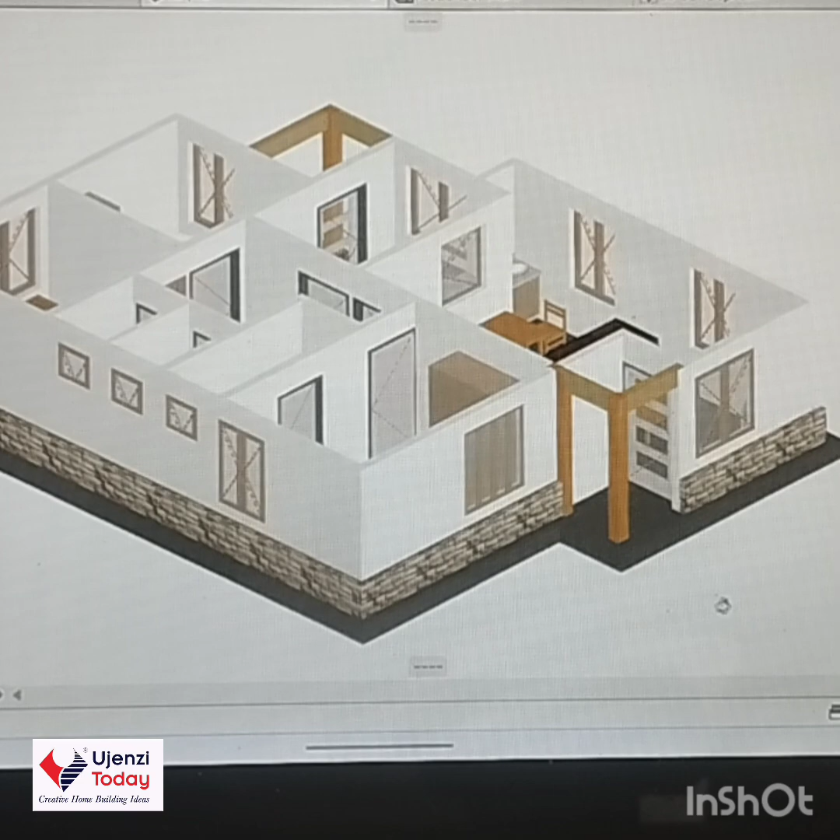Then when you come to this other side in the kitchen, you also notice we have the kitchen and the wash basin for the dining, and they are also just around the same space. That is also one reason why this house is cheap to construct.

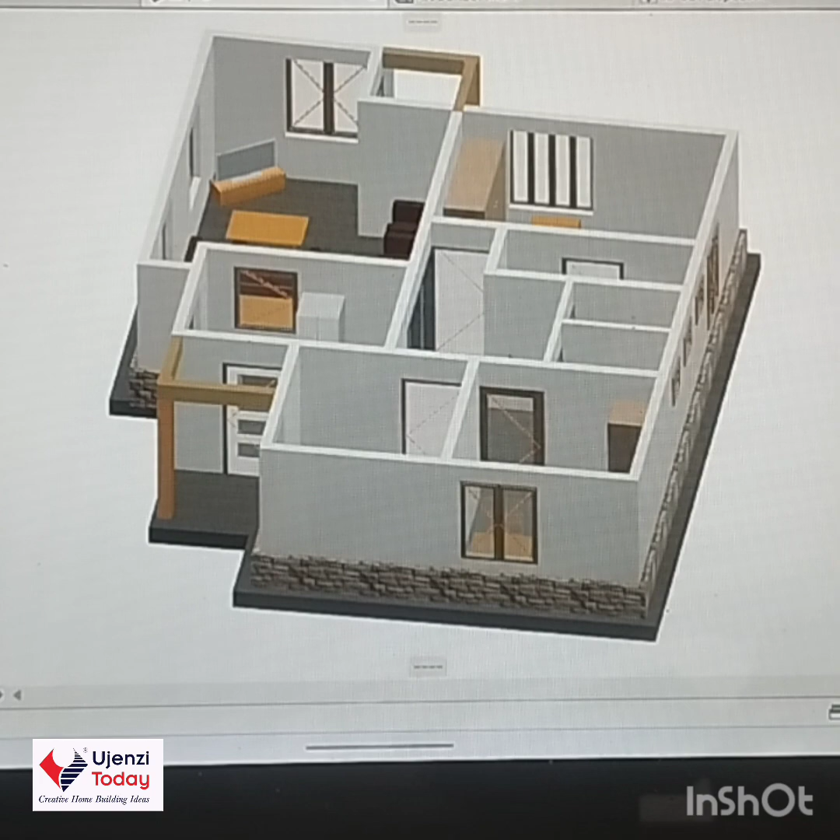Another reason is that we've also really worked on the space, so that you just have one passage around one common area where all the other rooms are accessed from. Another reason also why this house is cheap to build, or affordable. The right word is affordable. I look at the bedroom.

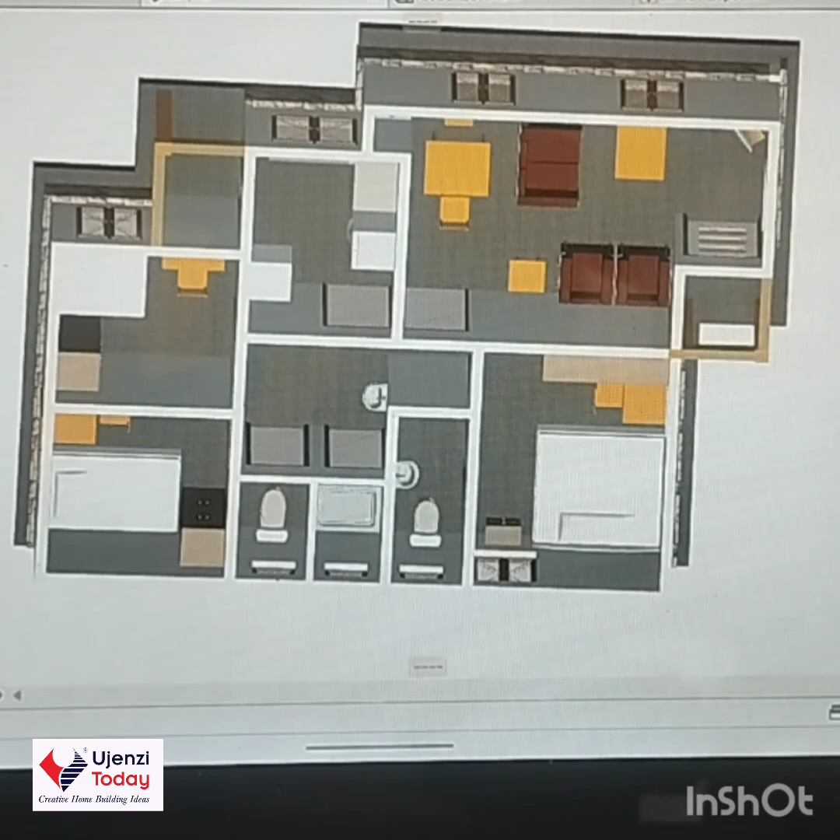The bedroom roughly is around 8 feet by 8 feet. It's enough for a 4 feet bed, a small table and a chair, and a small cabinet tucked in somewhere. The two rooms are equally of the same size.

Then when you look at the master bedroom also, you have enough space to put a 5 by 6 bed. You have even space to put a small table there, and you have your wardrobe also there to put your dresses. Then we've also tucked in a master bath for yourself.

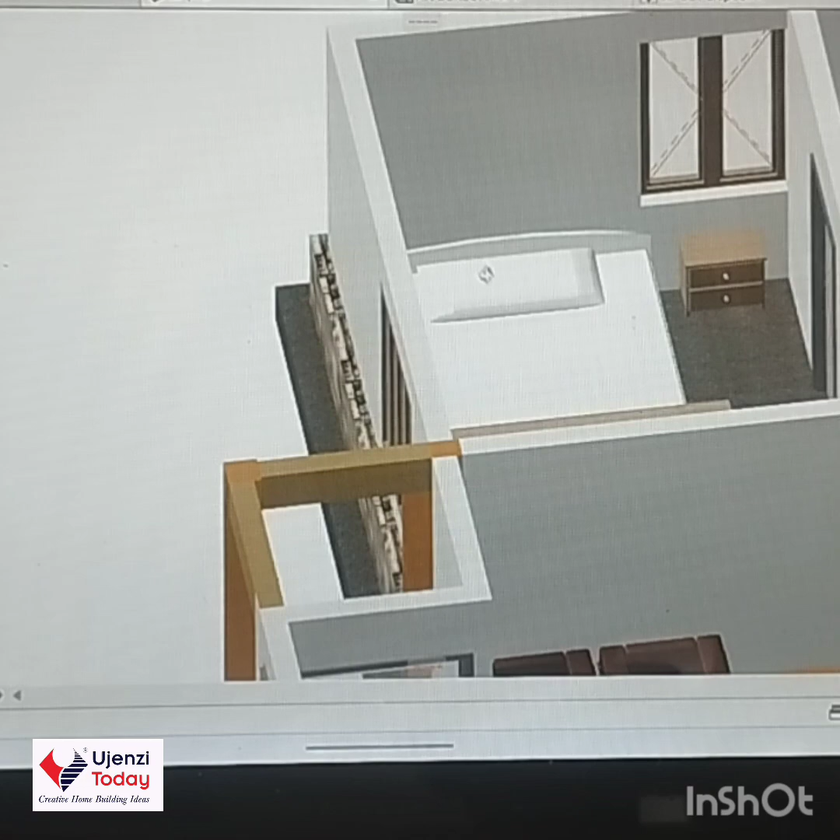And also the master bedroom is privately located. Between the master bedroom and those two bedrooms, we have a master bath, we have a common bath, and we have a common toilet.

So that increases a lot of privacy, even at night, when you're sleeping, or even when you have small kids and they're playing in the corridor, playing in the other rooms. It creates a lot of privacy for you.

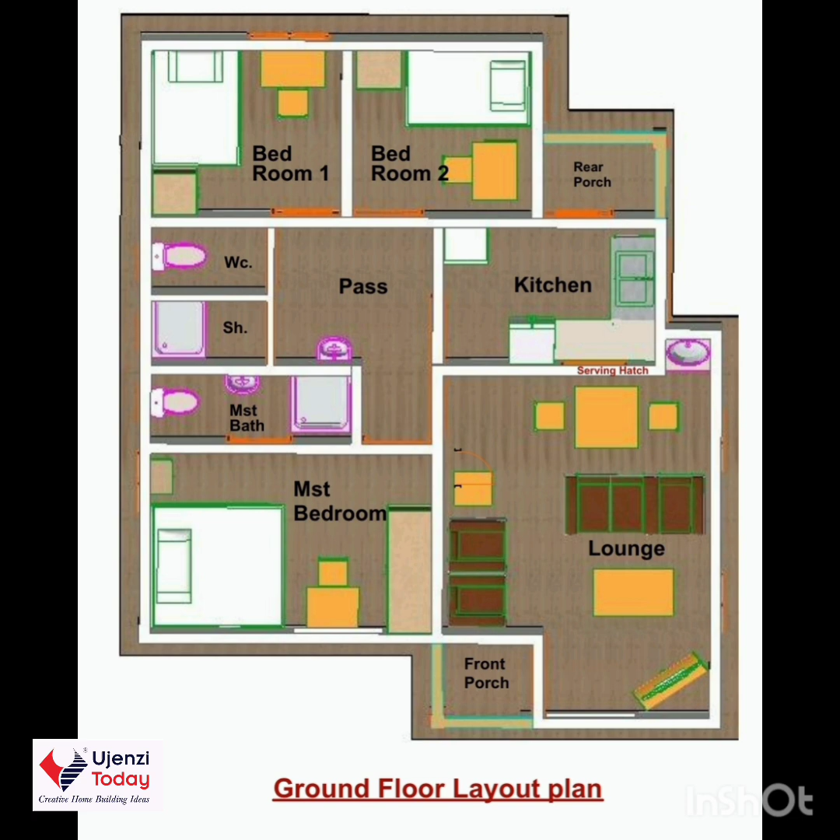So we've analyzed it, we've looked at it, even the roof, the way the roof is going to be, and the way we are supposed to build it. This was the first episode of this design, just to take you through the design and understand how the rooms are related from one to another, the free flow of people. So those are some of the positive highlights of this house.

When you're designing a house, let us just look at quality over quantity. Sometimes we tend to build a very big house, and I'm sure you've seen a big house and wondered why would this person build this big house and then do very poor finishing? And why would you even sometimes build a big house and not be able to finish? It's such a waste.

Just build a small and affordable house. It is small, yes, but not so small that you are squeezed and can't operate in it. It's just small enough that you can afford, that you're able to build and finish successfully, and that you're able to provide quality finishes for your house because you can afford it.

And remember, a small house is not necessarily a bad house. Sometimes that is what you need. You want maybe a house that is easy for you to maintain, to clean, where repairs and maintenance become easy and cheap. It's just an affordable house.

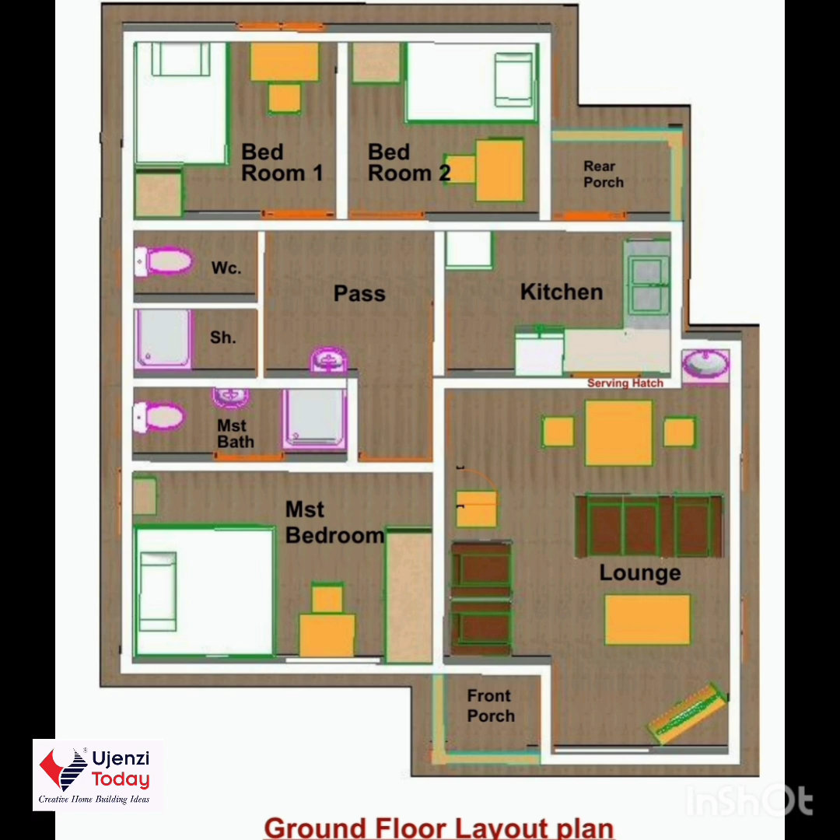And also, you find most of the time people say, 'I've squeezed myself in a rental house, I can't squeeze myself into my own house.' Yeah, that is very true. But what if you can't afford that big house? Will you wait until you get that big money so you can build this big house? Just build this affordable house and live in it.

I hope through the video you've been able to understand the areas that you can rectify in your design that can help you save money and just have an affordable housing for you and your family.

Our next section about the same plan, I'm going to take you through step by step construction of that house. Then you can see practically in the video that is coming, the step by step construction of this three-bedroom house.